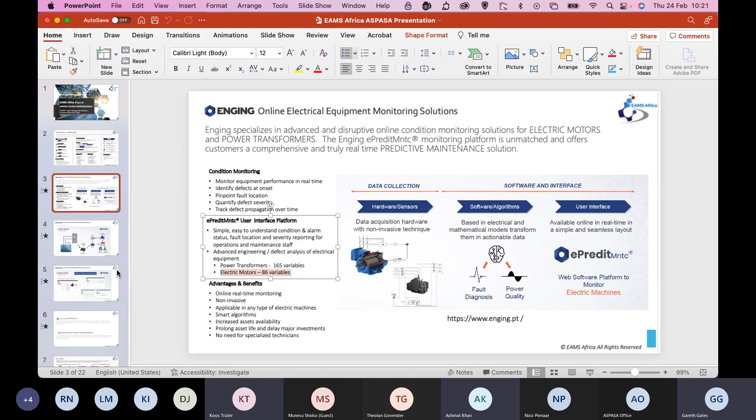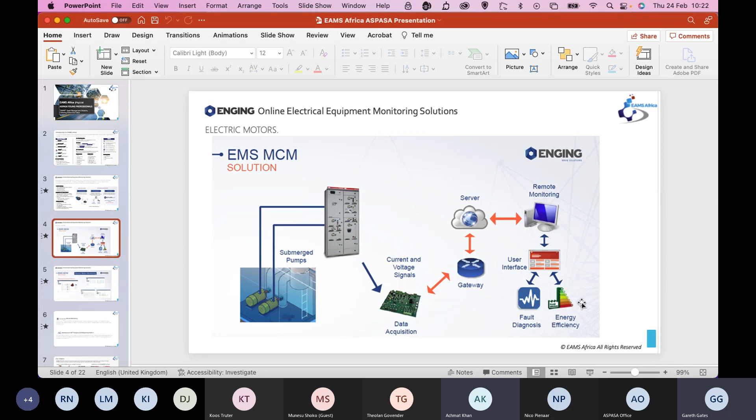The next slide gives you a quick overview. Here we've got 2 submerged pumps. There's your MCC - we look at your VTs and CTs, send it through a data acquisition card to a gateway, to a server, and then whether you're on your phone, tablet, or desktop computer, you log in and get access to fault diagnosis, energy efficiency, and other insights.

When you log in, you get your overall dashboard, which you can see on the left, and for your plant operators there's a very simple dashboard: blue means it's offline, yellow means there is something going wrong, red means it is critical, green means it is running very efficiently.

For more detailed analysis, there's your traditional motor current signature analysis - you can look at the waveforms and the fast Fourier transform spectrum analysis to see what is happening. The software will tell you when something goes wrong; you don't really need to be a condition monitoring specialist to understand that.

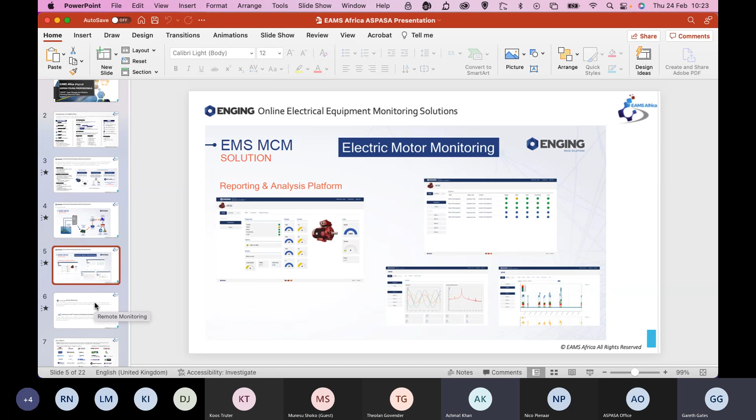And now I'm going to hand over to Koos to do a demonstration for us on the IOX Connect platform.

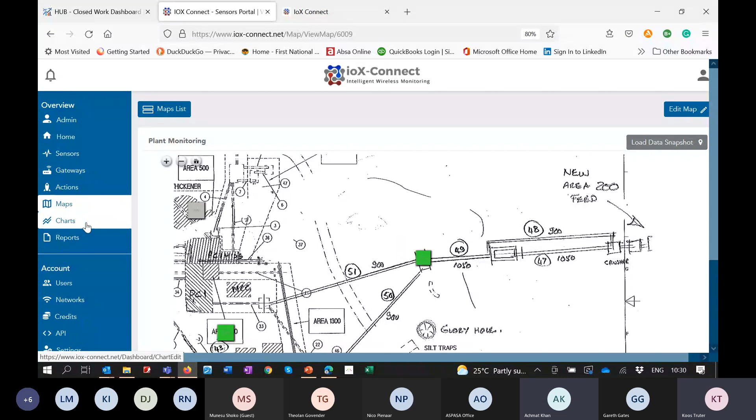What you can also do is select charts. So if I just go select charts, I can chart it and see what's happening with this. And you can create reports and notifications. So you can send out notifications by email or WhatsApp, or you can even have robocalls to wake people at night.

So going back to you, Gareth, if you just want to close out, then we just thought to show you some of the advanced maintenance techniques that are becoming very real in the world, and it's very exciting.

A lot of them are focusing on machine learning. A lot of them are focused on developing advanced algorithms for predicting. There's some more interesting stuff we do have, where we can actually predict the failure probability and time end of life for equipment based on vibration metering.

We can also predict parts requirements and optimal maintenance period schedules based on Weibull analysis of maintenance events. Looking at your history, you can predict when your cost of maintenance is going to start impacting negatively versus the reliability.

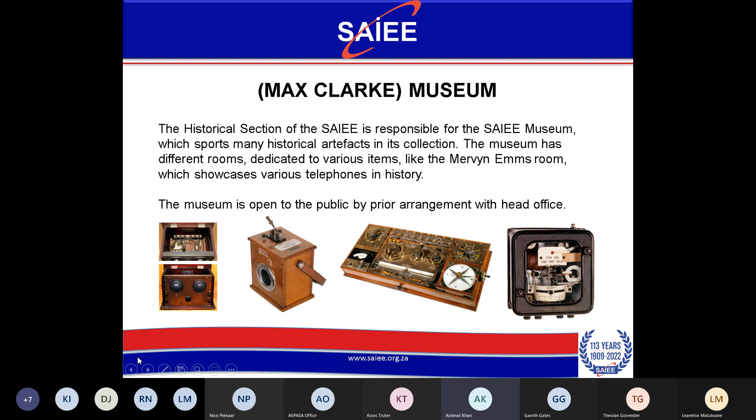Just one point to add is that companies can save on training costs by booking multiple employees. So we do offer a group discount for 5 people or more from the same company.

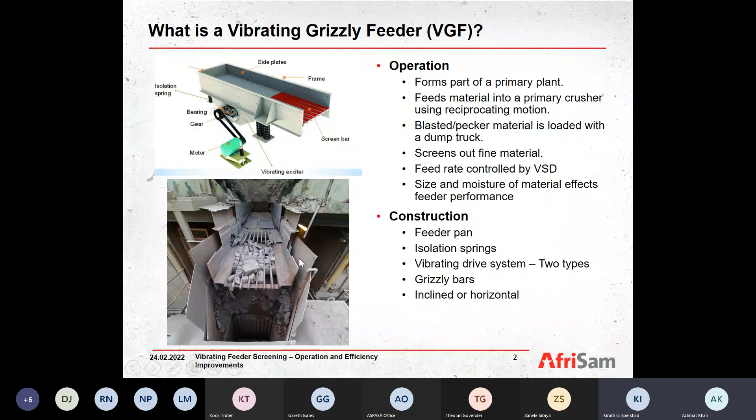The vibrating drive system of the feeder imparts a linear reciprocating motion through forces from unbalanced eccentric motion. The two common vibrating drive systems for vibrating grizzly feeders are the dual eccentric shaft type and the dual unbalanced motor type. The dual eccentric shaft type is a self-contained drive unit with two parallel counterweighted offset eccentric shafts. These shafts include adjustable counterweights to get the desired stroke, and achieve synchronization through a timing gear. Both shafts sit on roller bearings lubricated through an oil bath, and this drive unit is belt driven.

The other type of drive system, the dual unbalanced motors, includes two separate vibration motors mounted onto a common motor beam, allowing them to work together. This system also includes adjustable counterweights to get the desired stroke, and achieves self-synchronization during operation at rotational speeds higher than 70% of its max rated speed.

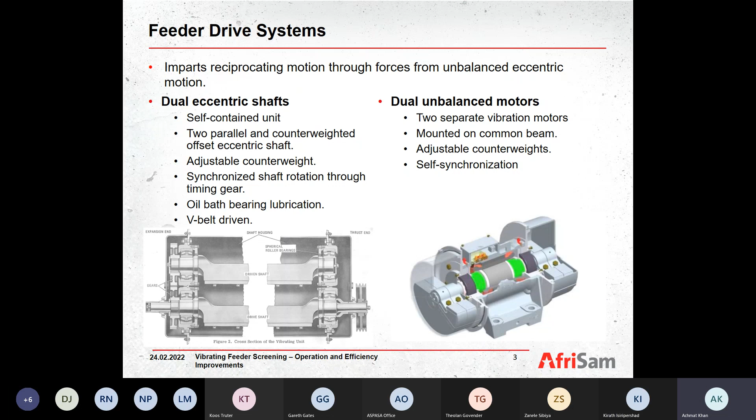Then you have the angle of incidence, which is the angle at which the reciprocating force occurs, achieved through the use of timing gears or a common motor beam, where the beam will be designed with that angle of incidence. This vibrating principle also allows for the material to be alternately lifted and conveyed on the feeder.

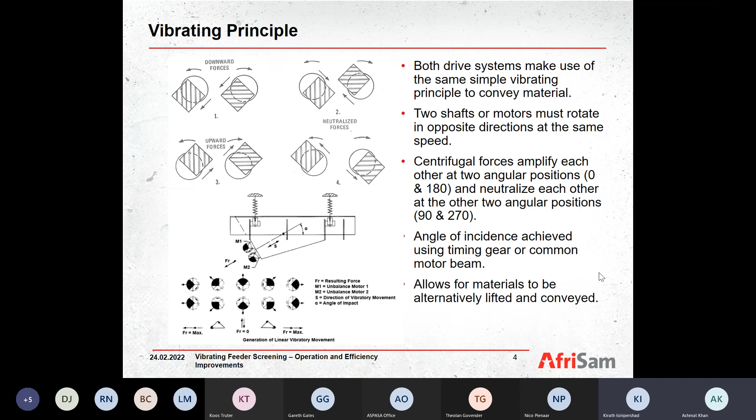Now that we understand what a vibrating feeder is and how it works, I just want to present the improvements that were made to a feeder on one of our sites to achieve the required efficiency. The reason for the improvement was because the drive system of the feeder on site faced continuous issues.

The existing drive system on the feeder is the eccentric shaft type, and it had constant oil leaks, which led to overload trips in the plant. These leaks also caused bearing failures due to insufficient lubrication oil.

These breakdowns were occurring regularly and were considered to be high cost and have high repair lead times, because when a failure occurs, all 4 bearings have to be replaced, where each bearing costs approximately 10,000 Rand. The lengthy repair times also meant significant production losses for the plant to incur.

Due to these breakdowns, the plant had reduced availability to crush, and therefore the overall equipment efficiency targets could not be achieved. Thus, a decision had to be made to either repair the existing drive unit or replace the unit entirely. The decision was finalized when a major failure occurred on the 4th of November 2020, where a few of the timing gear teeth broke on the existing drive system.

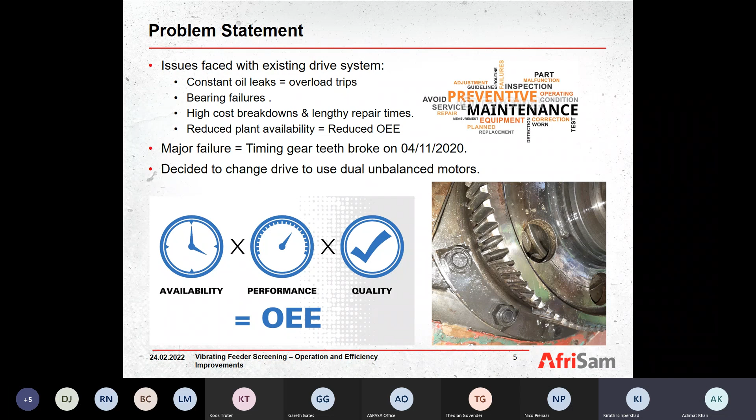So to repair the system would mean machining new gears, which would be a long repair time as well as very expensive. That's why we finally decided to change the entire drive unit to use dual unbalanced motors. In order to change the entire drive system successfully, the unbalanced motors needed to be selected correctly to handle the load at the required feed rate.

Some considerations that must be made when selecting unbalanced motors are firstly the required stroke of the feeder, which for grizzly feeders should be around 10 to 15 millimeters due to the large particle size. Then the feeder pan mass, which excludes the drive system mass and any material on it. The drive system mass as well as the working moment also needs to be known. The working moment is a parameter that incorporates the centrifugal force exerted as well as the rotational speed of the motors, and it is the actual parameter used to select the motors.

Lastly, the material flow rate required should also be known so it can be validated against what the feeder can actually achieve.

For our system, Invicta BLZ motors were considered as it is the standard vibration motor used in non-ATEX environments, meaning non-explosive atmospheres, where ambient temperatures are between -20 and +40 degrees, and the available supply voltage was 525 volts. These are 6-pole or 8-pole motors, which are best suited for grizzly feeder applications due to the high amplitude that can be achieved by them.

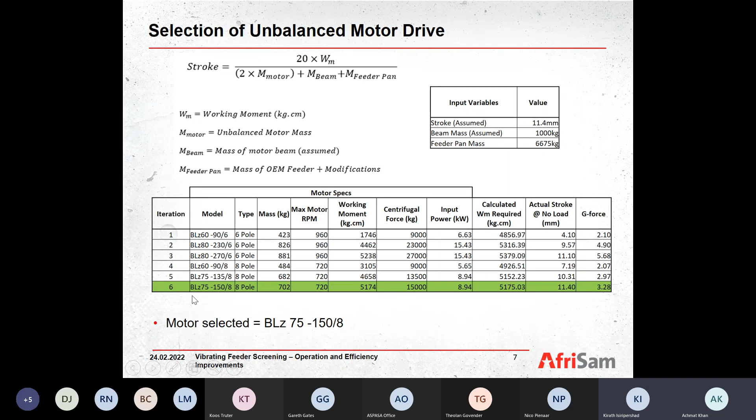Now that the motors were selected, the new beam could be designed. The new beam was designed by Mine & Quarry Supplies, specialists in vibratory machinery.

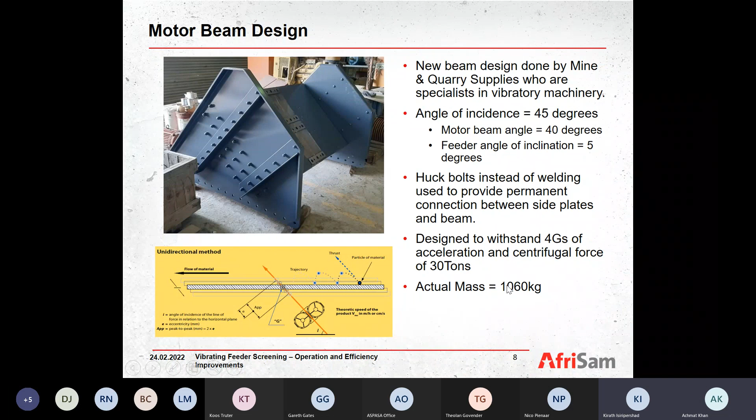The beam was designed to withstand 4 Gs of acceleration and a centrifugal force of 30 tons, and the actual mass of the beam worked out to be around 1,060 kilos, almost the same as what we assumed it to be.

To understand how the feeder will perform on site with the new drive system, we have to understand how it will be operated. So considering the scenario where the operator of the plant varies the motor RPM, stroke is a function of the centrifugal force applied, rotational speed, and the load the motors are subjected to.

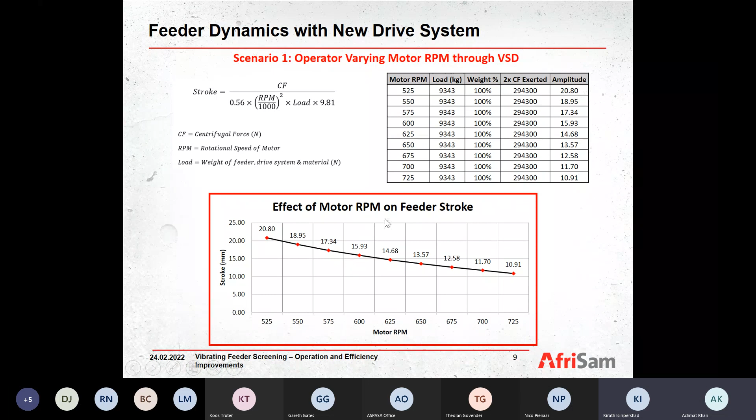In order to determine the material flow rate that the feeder can achieve, we first need to determine how fast the material is moving on the feeder, which is the material velocity. If you look at the motion of a rock particle on the feeder, you will quickly see that it matches that shown in projectile motion.

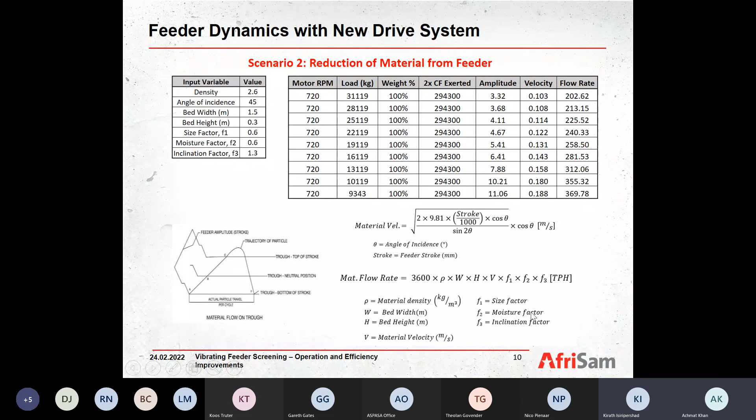As well as the velocity of the particle and the factors that influence the flowability of the particle, which is the size, moisture, and inclination.

Using this data, graphs were plotted to map the relationship between material load and stroke, as well as the relationship between stroke and material flow rate.

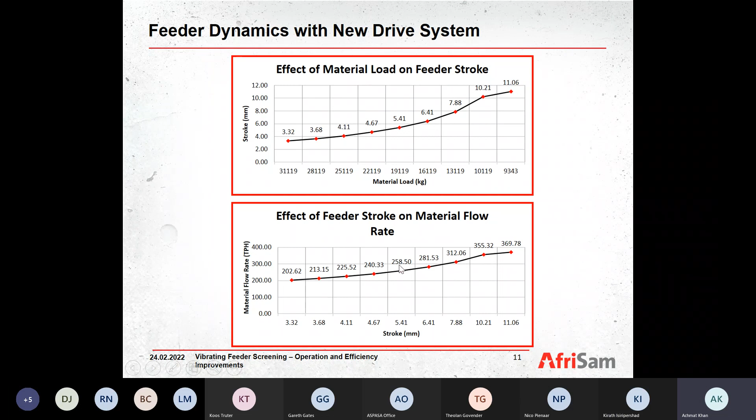This discussion of our findings still indicates that a higher number of poles on your vibration motor does equal a higher stroke and higher material flow rate, under the assumption that all other parameters are kept constant, like your RPM and your Gs and G force exerted.

The design flow rate achievable was calculated to be an average of 273 tons per hour, and the plant produces material at a production rate of 150 to 165 tons per hour.

There are a few factors that influence the deviation in this flow rate, and that is varying material size, especially high fines content, moisture content in the material, which makes the material behave like a solid, material buildup on the feeder, which changes the feeder mass, and the pegging of the grizzly bars, which is when material gets stuck in between the grizzly bars and prevents smooth flow of material.

Load and haul issues that cause non-continuous crushing, velocity inaccuracies due to non-ideal projectile motion, material mass inaccuracies, as well as bottlenecks downstream that have lower capacity, such as crushers or conveyors downstream.

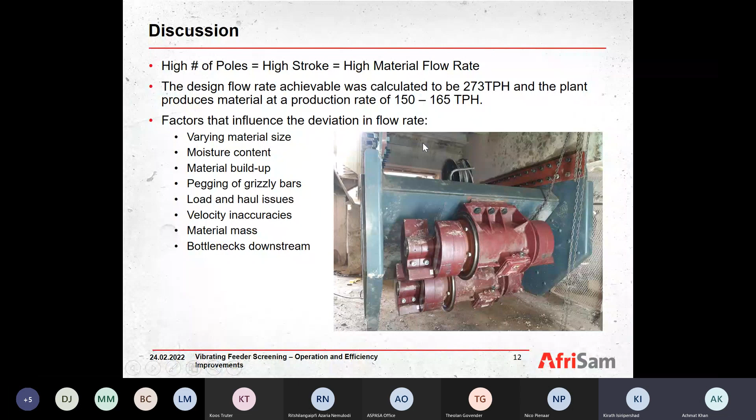Just going back here, this is after we got it finally installed. This was the two vibration motors onto that motor beam connected to the existing vibratory grizzly feeder on site.

In conclusion, I'd just like to say that we successfully implemented the dual unbalanced motor drive system for an existing grizzly feeder and achieved the required production rate according to the process.

The new drive system is simple and requires comparatively less maintenance, which means higher machine availability and increased efficiencies.

Some possible improvements would be to implement preventive maintenance schedules: to torque the motor hold-down bolts to 1,634 newton metres once a month, to grease motor bearings with 66 grams of Unirex N3 grease or an equivalent every 3,500 hours of operation, and lastly, checking for and cleaning material buildup on and under the feeder daily before startup.

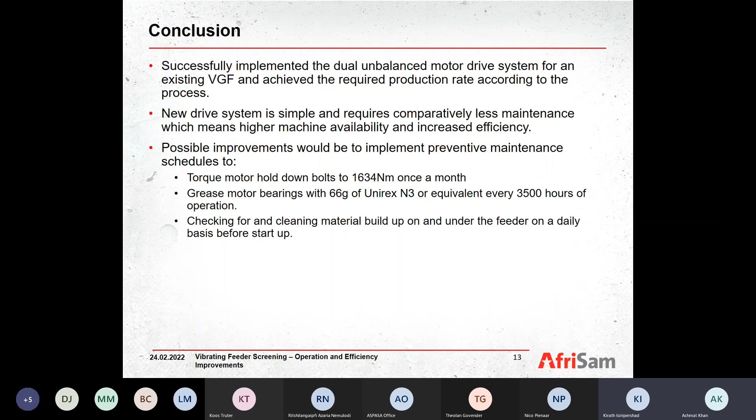Thank you for listening to my presentation, and if there's any questions, I'll be happy to take them. Thank you.